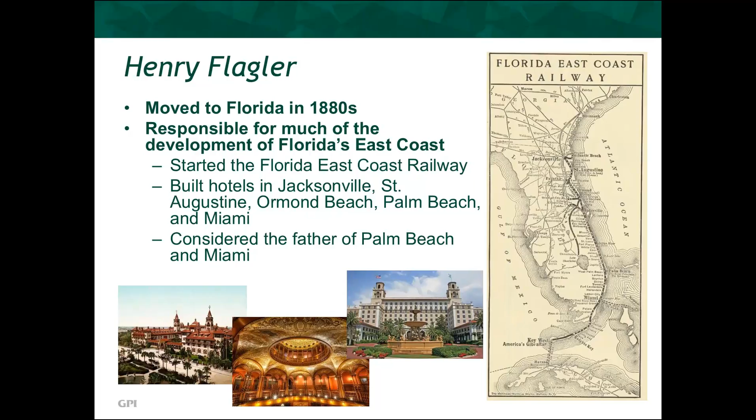And then in addition, all along the route, he built lavish hotels in Jacksonville, St. Augustine, Ormond Beach, Palm Beach, and Miami. By 1896, his railroad had reached the southern end of the peninsula, but he wasn't quite done yet, because by 1904, he had decided to set off on a new plan, which was widely considered to be impossible at the time. He wanted to extend his railway 128 miles beyond the southern tip of the peninsula to Key West.

Now, Key West at the time, at 20,000 people, was the most populated city in the entire state, and it also possessed the closest deep water port to what was then the proposed Panama Canal. In addition, the railway was going to provide increased opportunities for trade with Cuba and with the rest of Latin America. Flagler self-funded the venture, which I've seen estimates for ranging between $20 and $50 million, which brought into current currency ranges somewhere between $500 million to $1.2 billion for the total cost of the project.

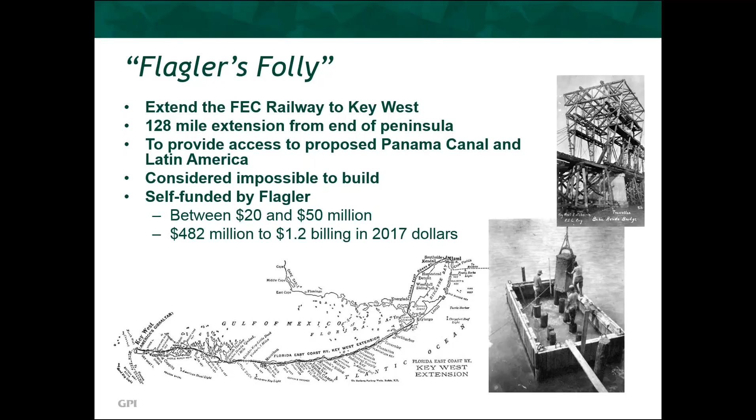His construction engineer, William Krome, surveyed several routes, quickly landing on the decision to follow the islands around rather than attempting to cross longer stretches of open water. The project has 17 miles of bridges and 20 miles of fill embankment. But of all that, there were 3 locations that posed the greatest obstacles.

First, there was a 2-mile long crossing from Long Key to Conch Key. There was a 7-mile long crossing from Knights Key to Little Duck Key. And then what was the deepest crossing on the entire project, the 24-foot deep, mile-wide crossing at Bahia Honda, which from the Spanish means deep bay.

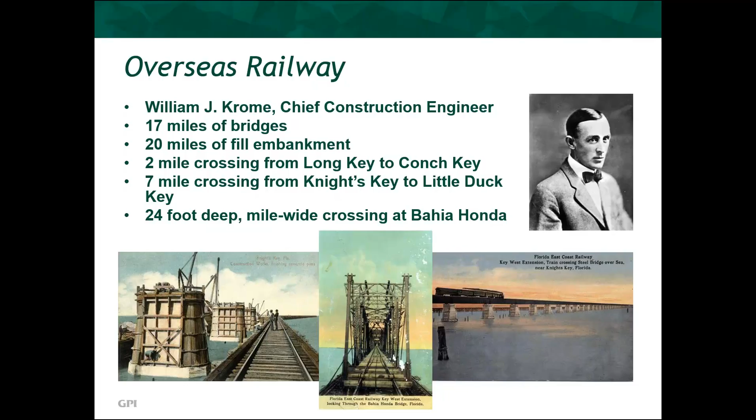With these particular site conditions, Bahia Honda is the only location along the route that utilizes a through-truss structure, and at over 5,000 feet long, it has an almost 250-foot long Parker truss span, which is surrounded by 26 Pratt truss spans, and on the western approach there are 9 plate girder spans. The shorter spans use riveted connections. The longer Pratt and Parker spans use pin connections, which made it the longest pin-connected truss bridge in the country.

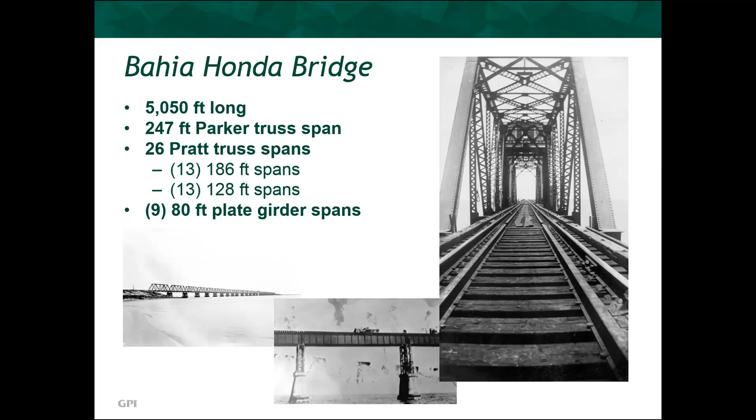Despite 3 hurricanes and hundreds of lost lives, the project, which at times employed nearly 4,000 simultaneous workers, was completed in 1912, just 16 months before Flagler's passing. At the time, the railway was being hailed as the 8th wonder of the world, which was a nice step up from when it was being called Flagler's Folly at the beginning.

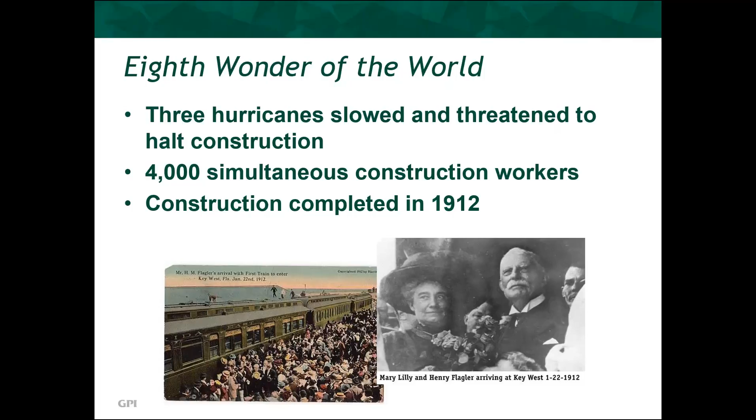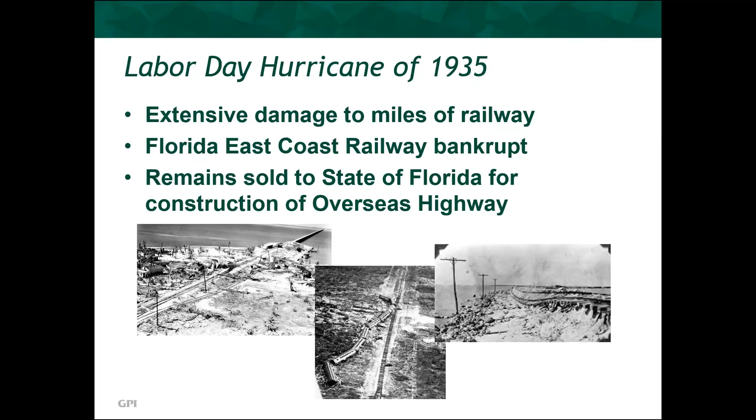The railway functioned until the Category 5 Labor Day hurricane of 1935. The Florida East Coast Railway, which was bankrupt at the time, was not able to fund the repair to the extensive damage, and as a result sold the remaining rail infrastructure to the state of Florida. The state had already begun construction on their Overseas Highway, and they ended up shifting the alignment in order to be able to reuse the remaining rail infrastructure that was still in acceptable condition.

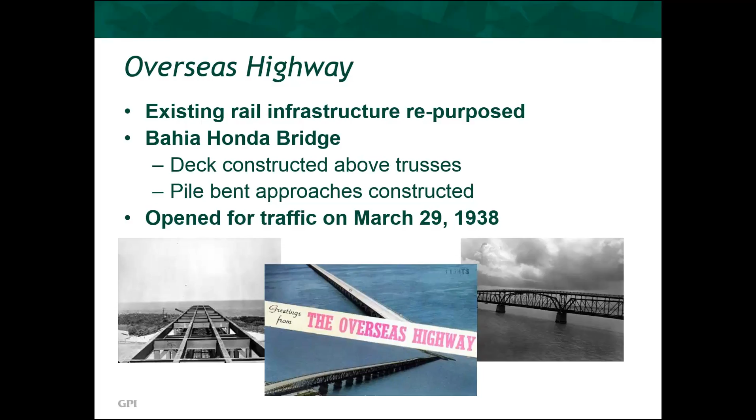At Bahia Honda, due to insufficient clearance between the trusses, they ended up building the deck for the 2-lane highway along the tops of the trusses and constructed approaches supported on pile bents to elevate the traffic. The approaches consisted of 2-span steel stringers, each placed directly over corresponding H piles. The highway ended up opening on March 29, 1938, as the southernmost segment of U.S. Highway 1.

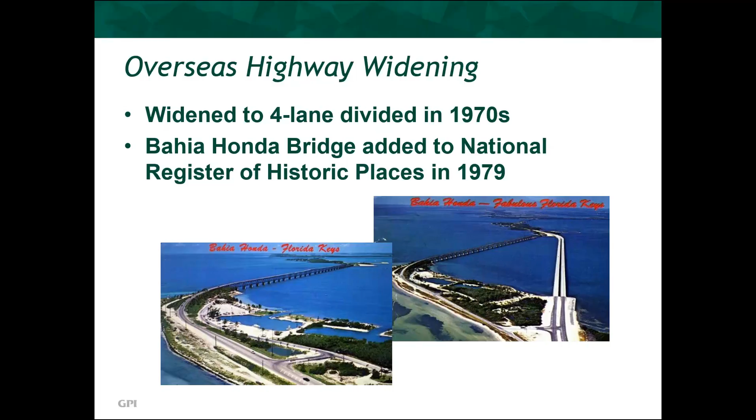With the widening of the Overseas Highway to a 4-lane divided highway in the 1970s, traffic was closed off from the Bahia Honda Bridge, and it was added to the National Register of Historic Places in 1979. Since then, access to the structure has been limited by the removal of a span from each end of the bridge. However, on the east end, it was the 3rd from last span that was taken out, leaving the approach spans and the first 2 truss spans available as a pedestrian overlook.

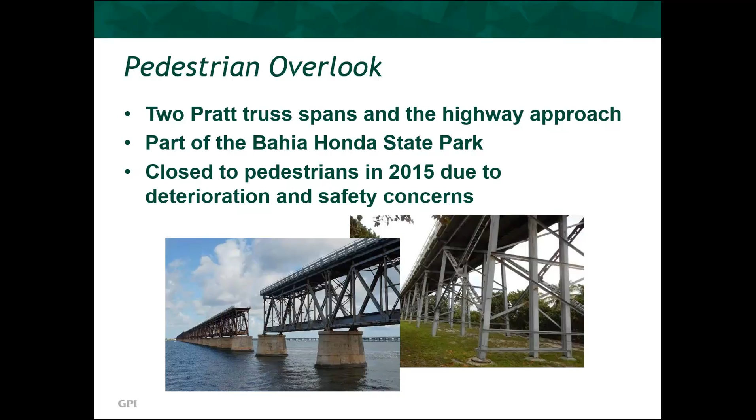The truss spans of the overlook were closed off to pedestrians in 2015 due to extensive deterioration of the structure and safety concerns for the public. And so we've been fortunate enough to be selected to assist the Florida Department of Environmental Protection with the restoration of this structure. And we were able to bring along Facility Inspection and Transportation engineering and underwater engineering services as part of our team, and they did a fantastic job with the field investigations and in giving us a better picture of the level of deterioration that exists with the existing structure.

And I'm pretty sure she probably took multiple photos of every component, because in addition to the report of findings that she sent us, she provided us with a CD of over 1,100 photos, which really was vital in our getting a good understanding of the deterioration member by member, and helped us with developing our plan for modeling and for coming up with our recommendations.

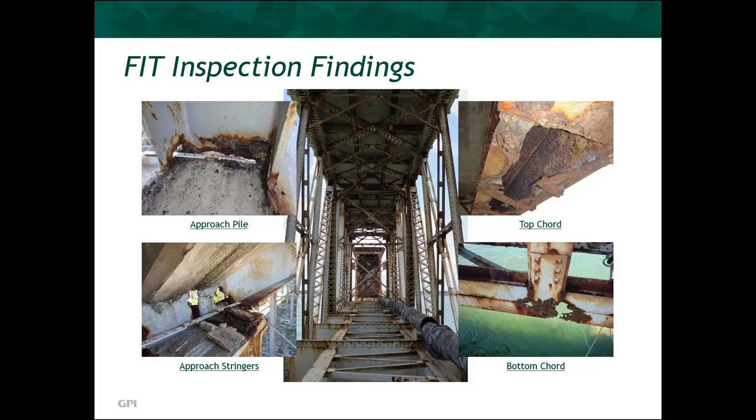And then on the right, you see a couple of photos from the truss spans, both top chord and bottom chord, where you see the extensive corrosion and the massive section loss that exists out there. In 2016, UESI went out to the site and performed the inspection of the piers and the abutment, both above and underwater. And we were pleasantly surprised to find that these portions of the structure were actually in much, much better condition than the steel. We were especially pleased considering these things are over 100 years old.

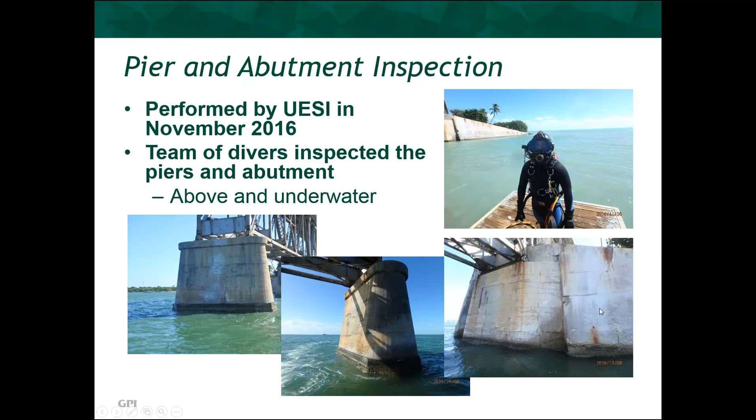They did find cracking, as would be expected, cracking wide enough for chloride infiltration, but there weren't any locations where they detected any corrosion bleed out coming from these cracks. Pretty much all the locations where there was corrosion were limited to support rods, well, rods that were protruding from the structure that we're pretty sure were there to support the formwork during construction. On the underside, there were also some locations of isolated poor consolidation, but again, not too surprising considering when and how the structure was built, and in general, it's in very good shape.

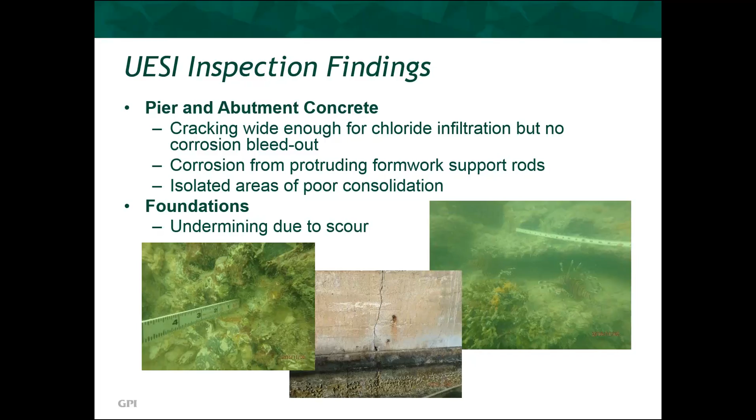On the underside, there are some areas of undermining due to scour. You can see a picture of that over on the right, and in general, it wasn't too bad. There probably is some minor amount of loss of capacity, but considering that the structure was designed for heavy rail and it's currently functioning as the pedestrian overlook, whatever minor capacity loss there might be isn't going to really affect the safety of the structure for its current use. Pretty much everything that was found in these areas just amounted to necessitating continued monitoring during the regular inspections and maybe some minor maintenance work. But in general, this stuff was all really good.

So based on the information we got from the field, we created our preliminary model. Going through all the photos and the report from FIT, we were able to develop some criteria based on the amount of section loss that was exhibited on average on a member-by-member basis. We applied that to our model to see where we ended up, and it turned out the structure wasn't safe for even the pedestrian loading and would require some strengthening. So we also looked at what it would take to get the members that needed to be strengthened up to a section that would actually be safe for the public.

As part of our report that we delivered to the DEP, we looked at multiple alternatives. Obviously, no build, but that wasn't really an option, just due to safety concerns of the bridge starting to fall apart. We looked at field rehabilitation, disassembly and then shipping the structure off for shop rehabilitation. And then we also looked at the potential of doing a replacement, essentially a replica structure. And then in addition to those 4 options, we looked at combinations of each of the 4 to see what made the most sense.

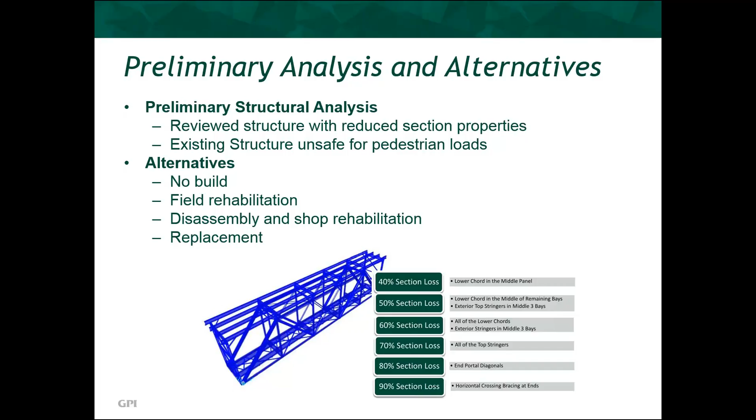Having presented our report to the DEP and then in discussions with them, we ended up deciding to move forward with a replica structure. Essentially, we're planning on reusing the existing piers and abutments, and then we're going to replace steel portions of the structure with a structure to look essentially identical to what's out there, but utilizing modern sections to replace all the existing built-up sections in order to facilitate greater efficiency in fabrication and construction, but then also to provide the DEP with a structure that's going to be easily maintainable for the foreseeable future.

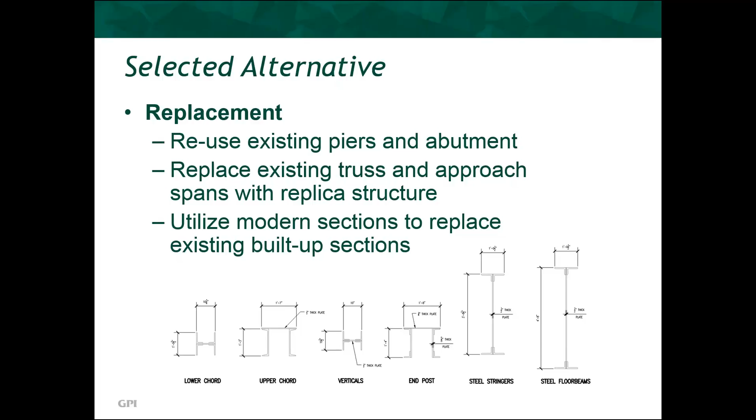So as I mentioned before, we're in the midst of design here, and the preliminary portion of the design has been done in a different software package. Looking at some of the features that were available in Midas, we decided that we would shift over to Midas for this next stage in design. We felt like some of the features that it made available to us would help in our analysis and also provide greater efficiency in that analysis.

So for the rest of this, I'm just going to touch on a few of the features that we found particularly helpful that helped us in that decision-making process of shifting over. Specifically, I'm going to touch on the import functionality and a few of the aspects of the import functionality that give you a little bit of a leg up once you have the model in it and can get started with assigning your members.

We're also going to look quickly at construction staging. I feel like the program provides a pretty straightforward setup for construction staging that works pretty well. Moving on to some of the reporting for the steel design checks, which are pretty detailed and provide an efficient manner of getting to the information you want. Then we'll wrap it up with how you can deal with custom sections inside Midas, since a structure like this has a lot of sections that aren't readily available in a drop-down menu. You're going to have to come up with a few built-up components, and the way Midas deals with it is actually pretty efficient and helpful.

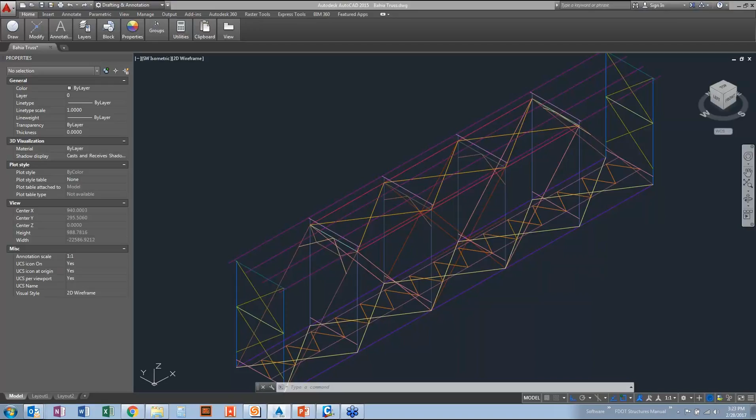So from this model, we export the DXF file and bring it into Midas. Let's make sure this is in inches. Pretty straightforward - you create your new file, and just import your DXF.

When this window pops up, you browse to the DXF file, and this is where having created all those different layers comes in handy. You can come over here and selectively bring in what you want, which is great if your model has additional information you don't want to bring in. You can be pretty selective about what you actually transfer over into Midas.

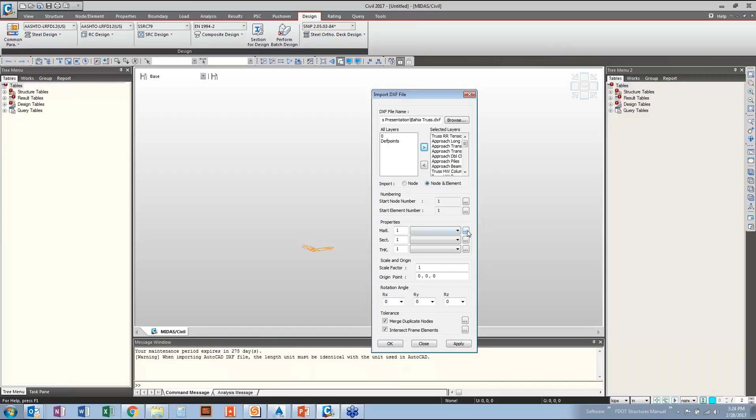Having selected all of those, you can come in. These properties you can just leave blank and deal with them later, but we'll get them knocked out now - obviously you can come in and add your material properties, steel or concrete or whatever.

Your section, same thing - come in and add your different types of sections. Since we've already got a file, we're just going to import everything we already have created in the other file. It's pretty straightforward, and now we've got everything in there, we just hit OK, and it pops your model in.

You'll notice over here the materials and sections that have been defined and assigned to something appear in black. The ones defined but not assigned to anything come up in blue. As you can see, when it pulls the model in from the DXF file, it just assigns everything to your first material and your first section.

One of the other things I find incredibly helpful is that all those different layers you were able to pull in, it automatically adds to structure groups. So you can go through and say there's 35 stringer elements, select every single one, keep them all together. This gives you the opportunity to look at them specifically, and the grouping helps quite a bit as you're going through your model trying to pull results and look at what's going on.

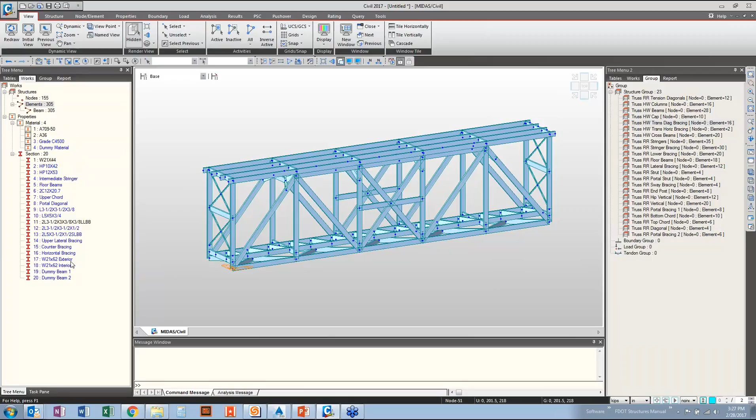In the same fashion, you can come over and select your diagonal bracing and say we want to make this a double angle. We just come over and assign it, and you can see it updates. With this number of members, it would take quite a bit of time to go through one by one and assign a material and a section, but with the way Midas lays it out, I find it to be just about as efficient as you can get.

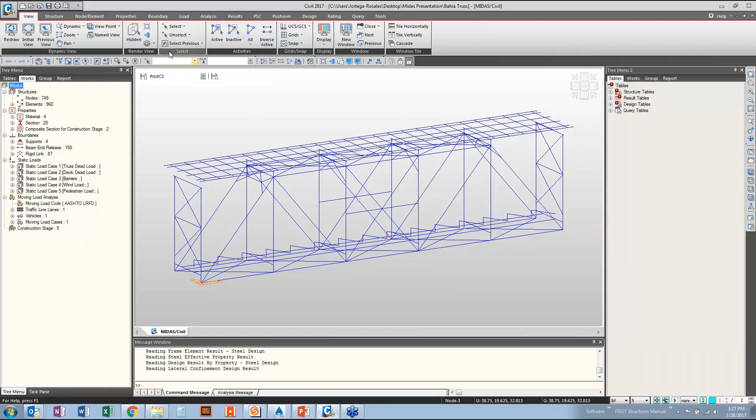So from here, we're just going to switch over to a file that has a bit more defined in it. As I mentioned before, we're still working on this job, so by no means is this a final model, not even our most recent model, but it's a good one to show these particular features. Here you see we've assigned all our member properties, all our section properties, and maybe shifted a few things around to get them in a better position than where we had it in our AutoCAD model.

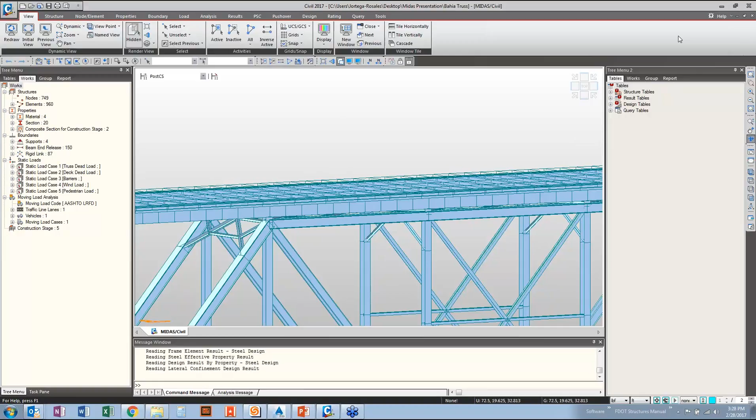With members like the portal diagonals, we've rotated those around to get them in a good orientation. Coming over here with the materials, you can see they've all been assigned to something, except the concrete that comes into play with the construction staging. We defined a dummy material, essentially concrete with no weight, assigned to these dummy beams we created to distribute load. We've also got another dummy beam just for the barrier to represent the barriers.

So we've got our supports defined, and our beam end releases are defined. When you bring your model in and import it, pretty much every node is going to have full moment transfer. So locations where you want a pin connection or some sort of reduced restraints, you're going to have to define those, and that's been done here. There have been a number of rigid links created to transfer loads from one node to another. Got our loads defined, and we've got an H10 vehicle on there. So essentially all our structural components and our loads have been defined in the structure.

But in addition, we've created some more groups. So we've got the groups that were initially created on the import. We also have a number of boundary groups, both for the rigid links, but then also for the supports and for the end releases for the beams. And then we've also got some load groups that were created for the loads that the structure is going to experience.

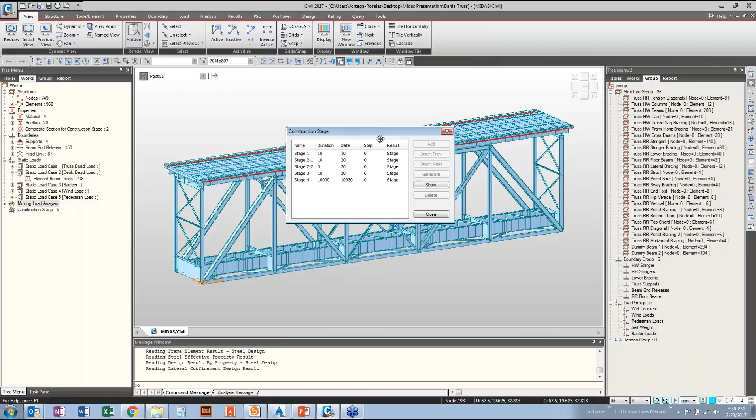For the construction stage, you can just come over to that button, and when you first set it up, this is going to be blank, and unlock the model. You would hit add, which would bring up a window just like this.

I feel the construction staging setup in Midas is pretty straightforward. Essentially, you're going to name your stage, set the duration of your stage, and then in this window you're going to get a list of the different groups that you've created. These structure groups will show up in this window, and then same for the boundary groups and the load groups. Based on what you are looking to activate in each stage, you would move it into this window. Whatever you want to deactivate, you would move into this window.

So in this first stage, we're creating the base steel portion of the structure. We've activated everything except for those dummy beams I had discussed earlier. We're activating all of the boundary conditions, and we're activating the self-weight of the structure.

Moving on to the next stage, you end up activating the wet concrete loads that we've applied to the structure. Then in stage 2.2, where the concrete has hardened, we're activating the dummy beams that we've defined, and deactivating the wet concrete load. In stage 3, you've got your barrier loads activated in addition to your dummy beam for your barrier loads. Stage 4 is essentially just your long-term structure with those loads.

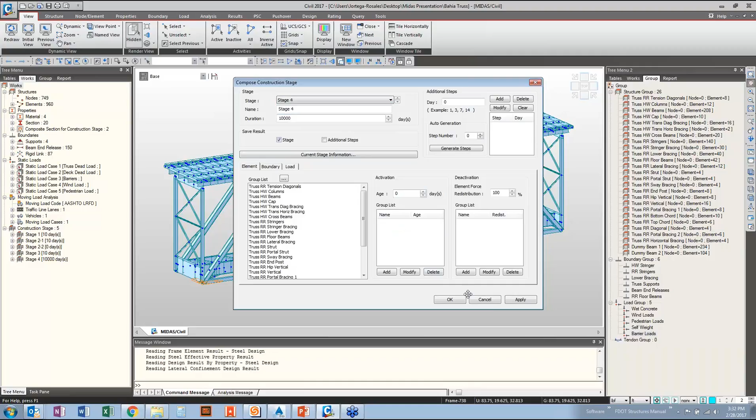In addition to defining your construction staging, for any composite sections, you can see here the stringers along the top have been defined as composite sections. So you need to come in and define your composite section for the construction stage.

Again, this would be empty, you would hit add, but essentially you come into this window and you select which stage the component is going to be activated in initially. You select which component you're looking at, and then down in this window, you tell the program when to activate each portion of the composite section.

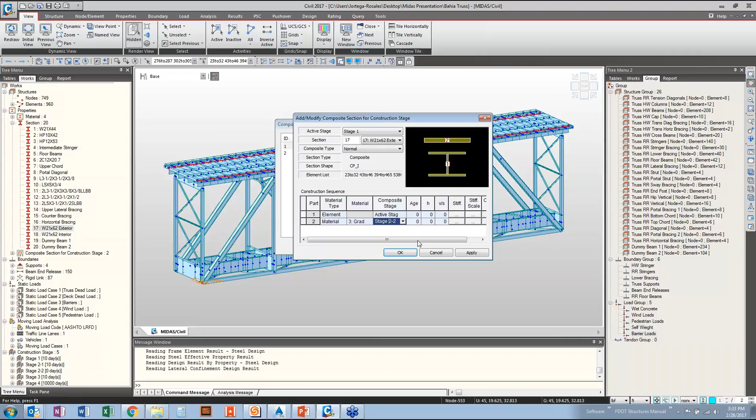So for element 1, you can deal with these as either the element itself or its material. We're going to deal with it as an element, activate it in the active stage, which we've called stage 1. For the second portion of the composite section, we're going to deal with it as the material. This is where that grade 4500 concrete comes in, that we've defined as being that material, and that ends up getting activated in stage 2.2. You would do that for each one of your different composite sections that you've defined, to let the program know when to activate those during construction staging.

So now that we've got everything defined, we can run our analysis, and that just takes a few seconds.

And so with that done, we can move on to some of the reporting for the steel design component. Coming over to design, this is where you can find all your different common parameters, your unbraced length, your K factors, slenderness ratios. You can define it globally, but you can drill down and define each of these properties on a member by member basis, and then come in and run your steel code check.

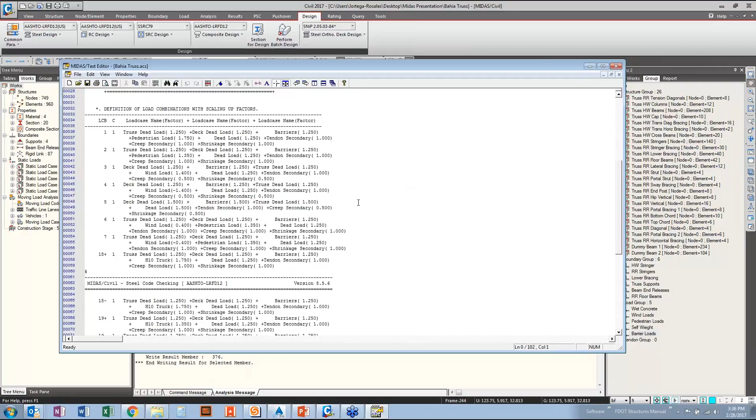But then you can drill down even more. Say we look at this angle, you can pull up a summary view that is really just the load combinations and then essentially the same information you got on that first screen, but in a nice printable format.

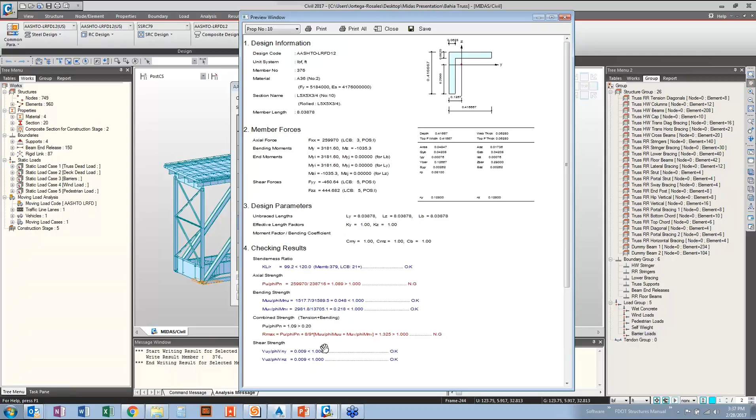You also have this graphic view that allows you to take a look at the actual section properties, the loads that it's experiencing, the forces in the member, and then each one of the checks, it shows you whether it's good or no good and where your ratio is sitting. So a good quick snapshot of any particular member you want to look at.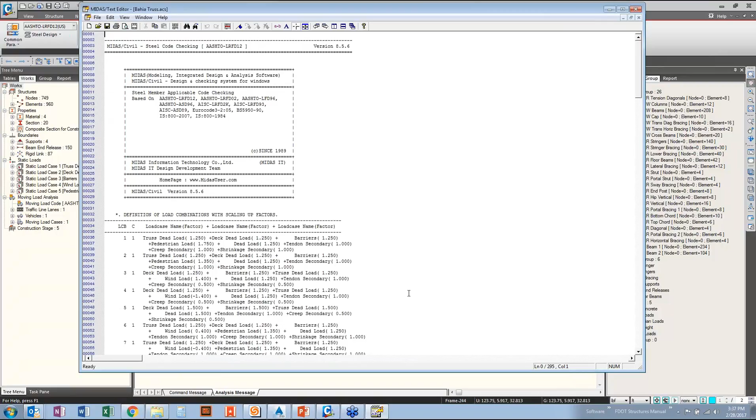And then if you want to drill down even further, for each member you can pull up this detailed view, which allows you to look at the load combinations, section properties, the loads that are being applied, and then it actually goes through all of the design checks, providing you with the reference that it's using from the particular code you have set, the ratio that it's coming up with, and whether it passes or not.

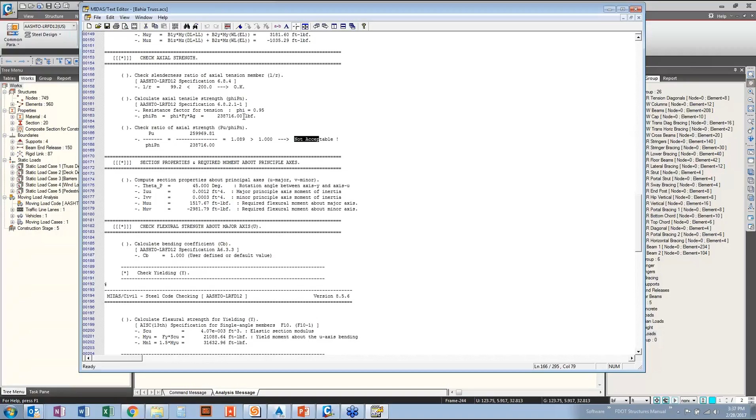And going through, you're looking at your axial strength, your flexural strength on the major axis, your lateral torsional buckling. So you can get a good snapshot of what checks are being performed, what are the references for that check if you want to go and dig into it a little bit deeper, what section properties is it using, what loads is it using.

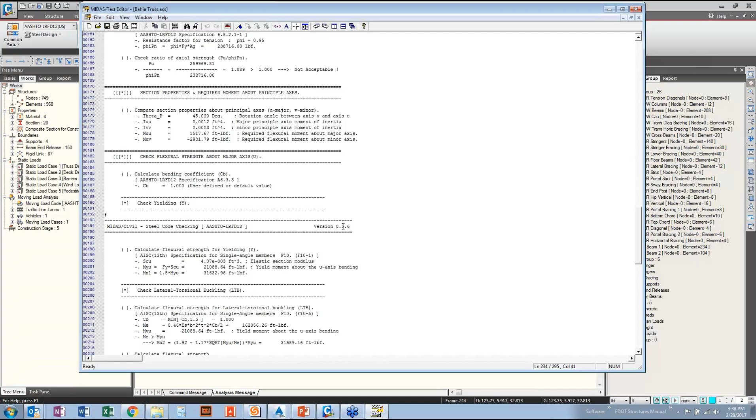So you can get an idea of, all right, well, did I somewhere mess up with some of my fixity or with how I've set up my model, and do these properties and these loads make sense for what I'm trying to do? And then if they do, you can look at the code references and figure out in more detail what's going on with numbers that are failing on you.

But then say from this window, if you want to take a look at replacement sections, you can just come up to change. You can hold steady within a certain range, any property for the element you're looking at, and then what range you want your ratio to be for the code checks, and then just have it search, and it'll pull up all of the members that work for that section to be replaced too. So you can even change if you want to go even lower to pull up more sections.

Really quick way to if you're certain that all of your design parameters are correct and your loading is correct, a very quick way to go in and figure out which section do I need to replace what I've got to get something that works in there.

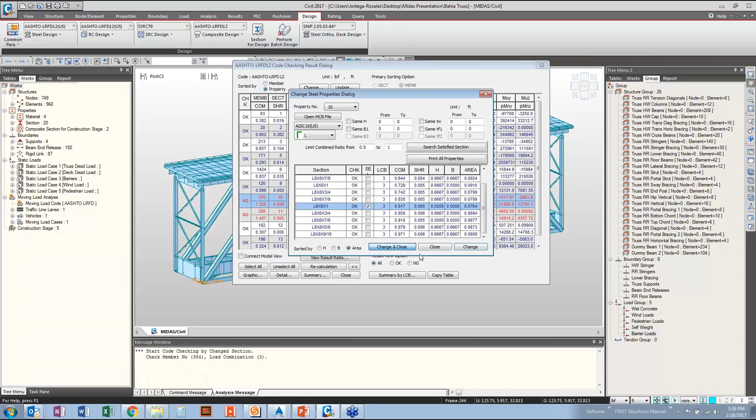So let's say you want to replace it with a 6x6, and you can just hit change and close. And you can see it updated the design check, and it says OK now. The one thing you'll notice, this is section 10.

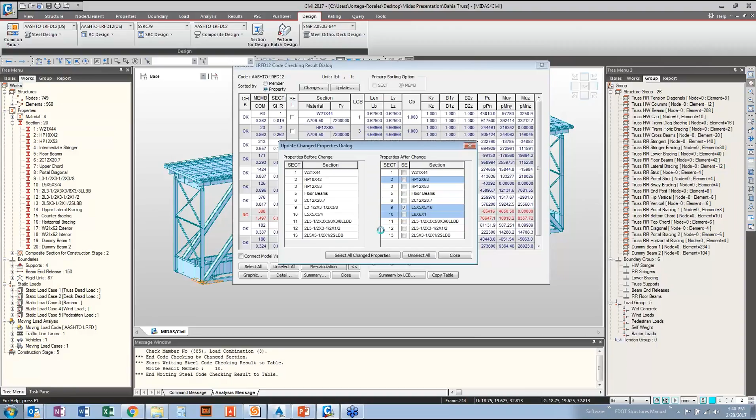Section 10 here is still showing 5 by 5. So if you want to actually update it into your model, you come over to update, you select the section you want to update, and now you can... should have updated. I don't know why it didn't. But

anyway, so with these code checks, the way that Midas displayed it is a very quick way to be able to get a good idea in general how your structure is performing, but then it's very quick to drill down, find specific members that aren't working, see what code checks aren't working to figure out if maybe there's something you need to tweak in your analysis, and then if not, find a section to replace it with.

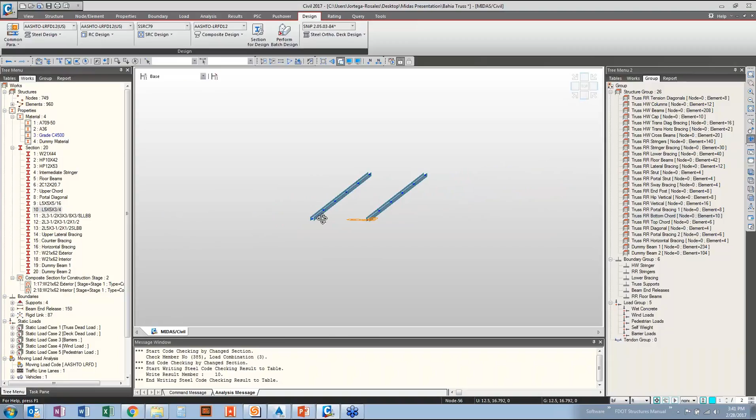So with that, we're going to move on to the last item, which on a structure like this, there are a lot of sections that are not going to be easily found. Either angles in strange orientation, or maybe channels that are put together with a plate on top or something like that. And what we're going to look at specifically is the bottom chord of the structure. You can see here what we've got defined right now is an H pile that's turned on its side.

What's out in the field is a series of plates and angles that are riveted together to create pretty much the same shape, except that there's a gap that runs straight down the center between the two portions. So, we could deal with it with a standard H pile just by cutting holes in the web all the way down. But what we're going to look at here is, what if we take a couple WTs and turn them on their sides, and that way actually get even closer to the existing shape.

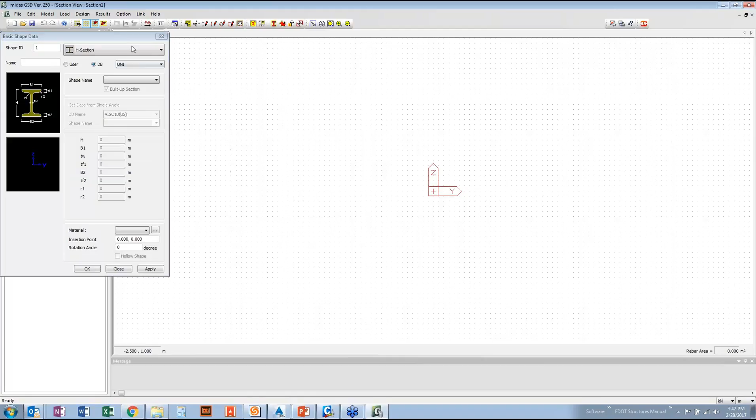And fortunately, Midas actually makes that a pretty straightforward process. You can come over to Tools and open up the General Section Designer. Coming over to Shape, you can right-click and add Basic Shape. We're going to add a T-section based on the AISC code, and we're looking at a WT 6 by 36. We'll define the material for it.

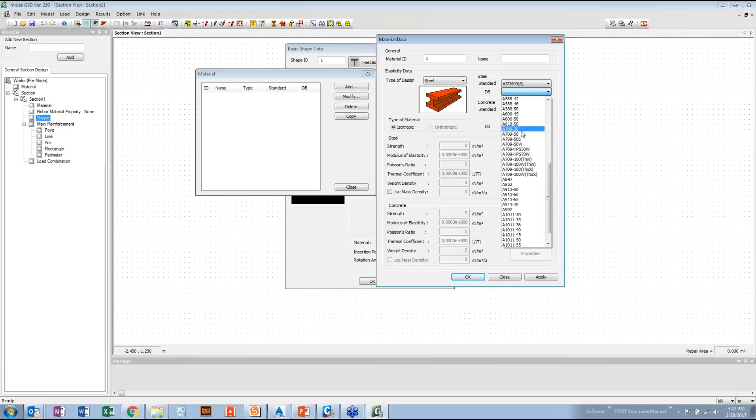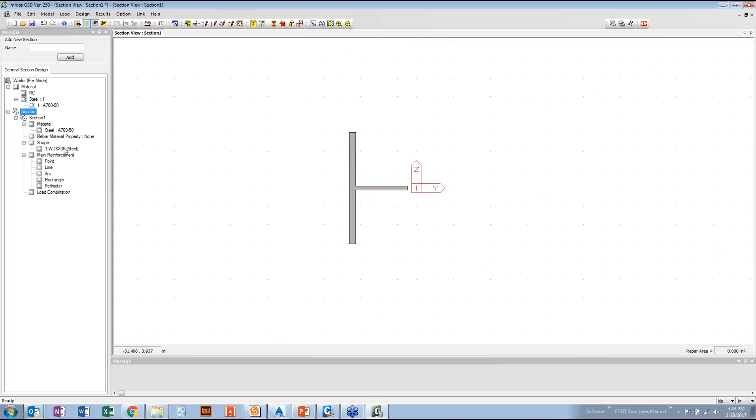And then changing this to kips and inches. We'll change our insertion point to -4 inches with a rotation of -90. And here's our first part of our section. So double-clicking, we can select that, and it's as easy as hitting Control-C, Control-V to copy and paste. And we can then edit the new section that came in and change its insertion point to 4, and then we'll just rotate it the other direction and hit OK. And now we've got essentially the section we're looking for.

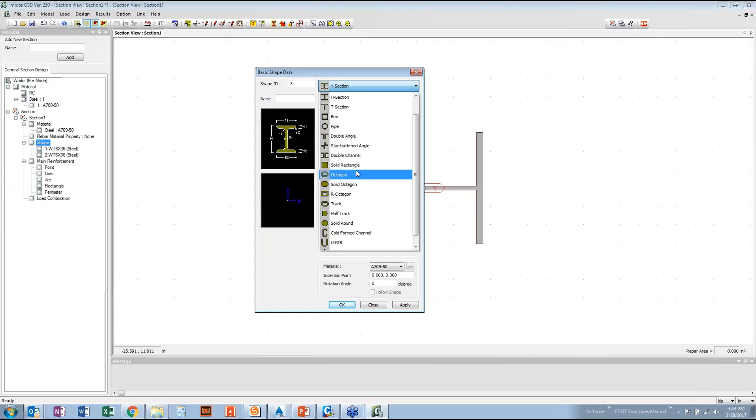One thing I've come across as an issue is with these custom sections, it seems Midas doesn't like when there's an open gap like that, like we have in here. The way I've gotten around that, and maybe when Jay comes back, he'll tell me there's a better way to do this, but this is how I've done it, is you can just add another basic shape, and I'll add in a user-defined rectangle and just give it a tiny thickness and a width to bridge that gap and bring it in.

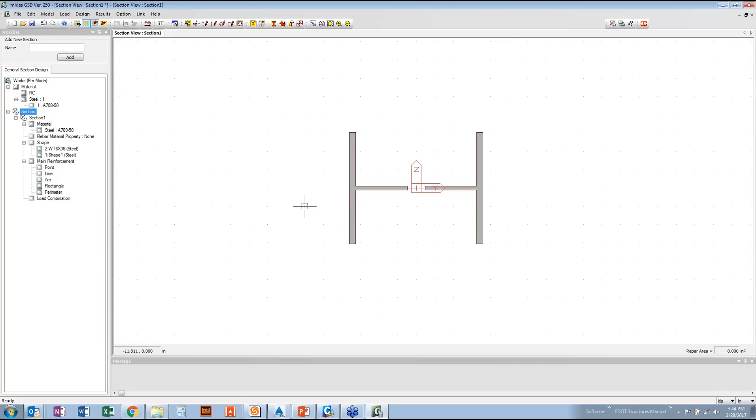And then we can select our members and merge them. We can do the same with these. And now we've got a single shape that bridges across that gap, and we can bring it to Midas. This button up here allows you to create your link to the open model. So simply clicking on that, it links over to the Midas model. You can see it went from red to green to show that it's linked.

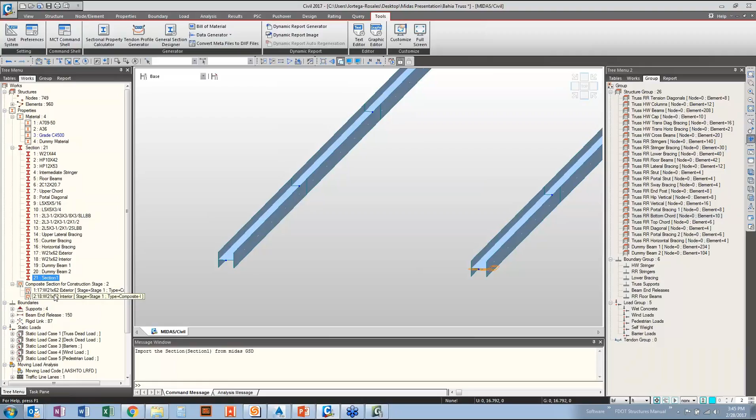And in the text box, you can type in the name of the section, there's section 1, and hit export. You can see it was brought into Midas there. And so we can select our bottom chord, and we can assign it to that new section. And since we had the H shape in there, but we had it rotated 90 degrees, when it brings in this new section, it's now rotated 90 degrees as well.

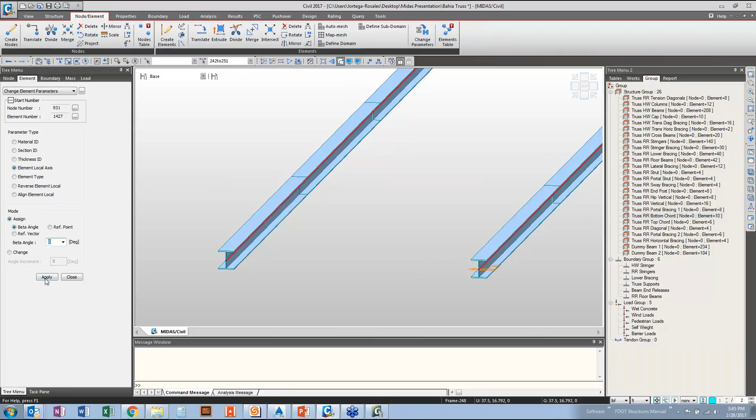But that's easy enough to fix just by going to Element and then Change Parameters. And this is the window where you change all the individual parameters for a component. You can change the material ID or the section ID. We're going to change the element local axis, and we're going to change it back to 0. So you just hit apply, and so you can see the section we created that's been brought into Midas, and we can rerun our analysis on it.

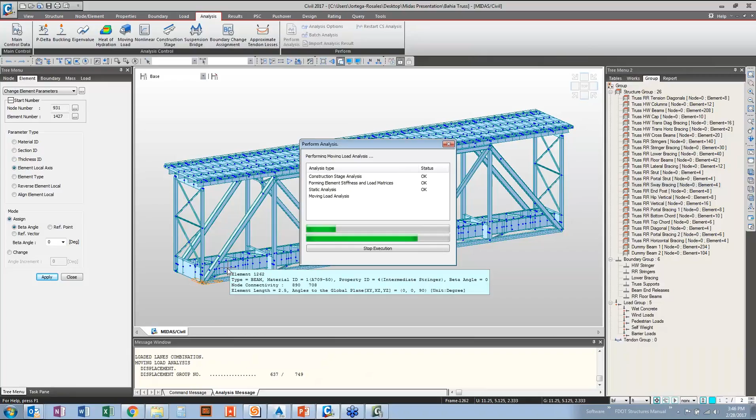Now, when I was running the steel design checks earlier, you may have noticed in this message window there were a number of sections that were coming through that said that they couldn't be analyzed using the steel code checks. And those are either going to be your concrete sections, or for a lot of those, the built-up sections that have been created in the section modeler and brought in.

Midas doesn't actually check those within the program itself, but it does give you the capability of bringing that back into the section designer in order to check it over there. So now that your analysis is done in here, you can reselect that bottom chord, and you can see here in the selection window that those particular elements have been selected.

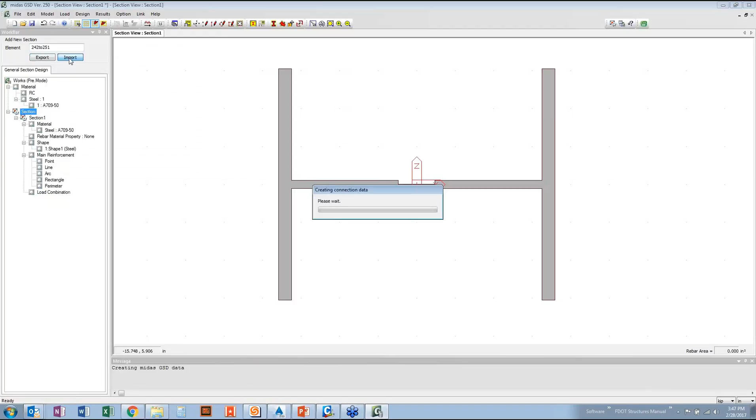Going back into the section designer, you can see that those same elements have popped up in this window, and all you have to do is hit import. And it asks you which load combinations and which parts of the section you want to pull in. For this, we'll just pull everything in, hit OK. And as you can see, here's the section we initially defined, and here's the section that got pulled in from Midas with all your load combinations in there.

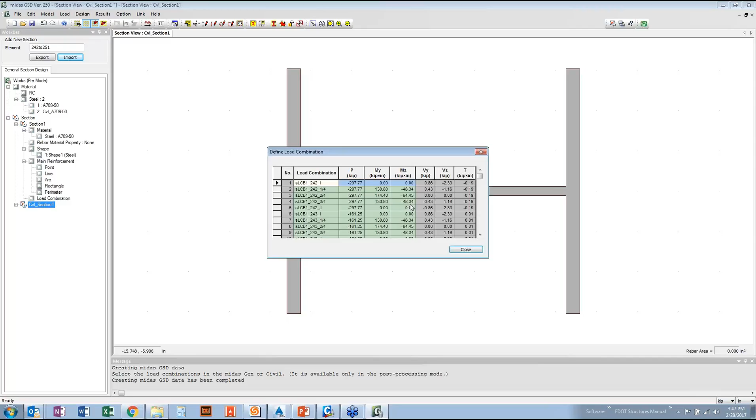So you can double click on that, and you can see here under define load combinations, it's brought all that information in from Midas. I'll go in and change our design code to AASHTO and hit the design section button.

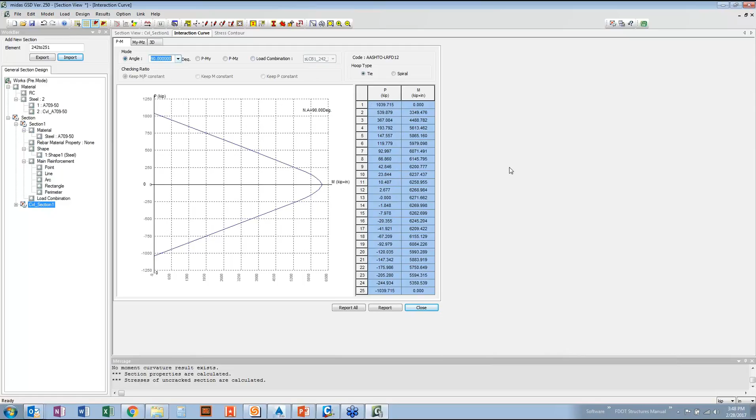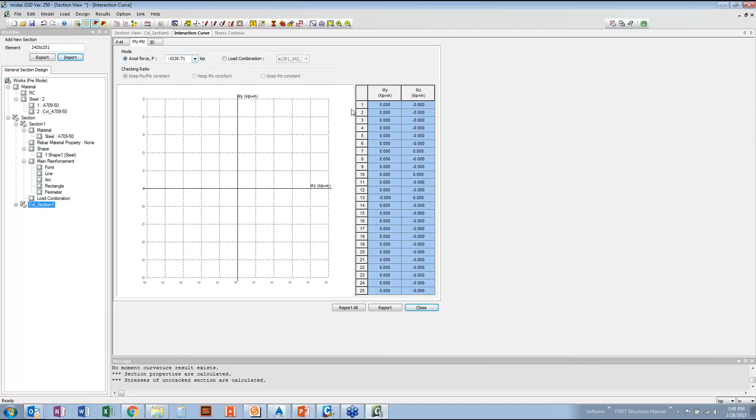And once it's run the design, it gives you a wealth of information on the interaction diagrams, axial moment in both directions. You can look at it by load combination, you can look at it by angle, and obviously it pulls in all the relevant information on this side. You can also look at your moment interaction by load combination or by the concurrent axial force. Again, all the information is over on the side here.

But then I really enjoy this view. It gives you a 3D view of the interaction where you can see the axial moment interaction, the moment interaction, and it provides you all of your ratios off to the side for your various load cases.

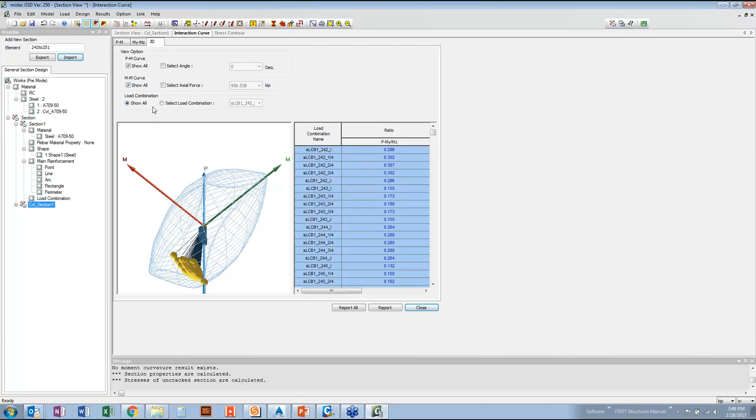And as you can see, because it's the lower bottom chord, you've got pretty much just axial loads in there, but you can actually show every single load combination. You get a few where there's a little bit of moment in there. But those obviously are not the controlling, there's almost no load in there. But really a useful tool.

And Midas provides a great means of being able to take these custom sections that can be relatively complicated, complex. You can put them together pretty quickly, get them into Midas, get them analyzed, pull them out, and then run your design checks. And you can see we did all that in about, I don't know, 5 minutes.

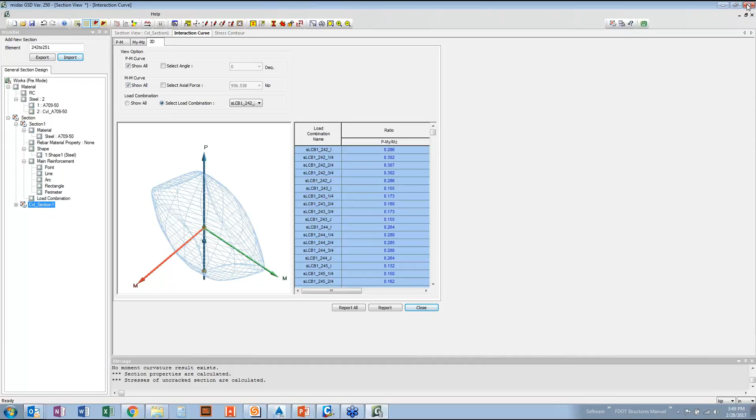So just one more thing I'm going to mention real quick. Another thing I like about Midas is just the fact that pretty much everything in Midas, you can pull up a table view for it. I find this incredibly helpful, not just because if you want to change a property in a number, you can just select the cell and copy and paste it across 20 others, and it updates like that.

If you want to pull information out of Midas, you can export all these as Excel spreadsheets, and you can pull all your results out into Excel and then develop maybe an external check if you want to corroborate what you're seeing in Midas. It provides you a good way of getting that information out in a useful format.

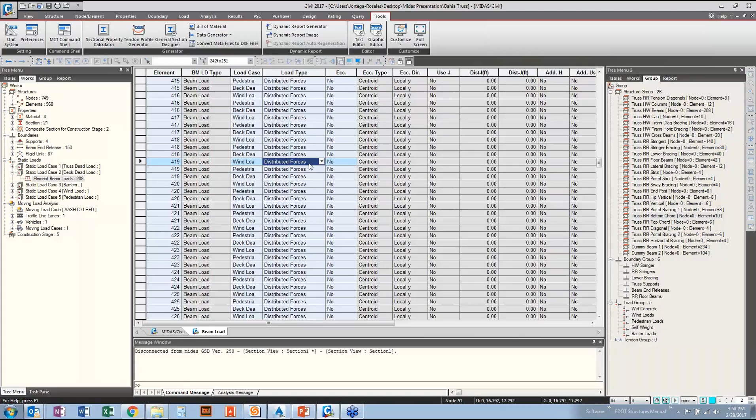And so with that, those were pretty much the main features I was just wanting to go over real quickly with regards to our decision-making process to switch over to Midas for this final portion of the design.